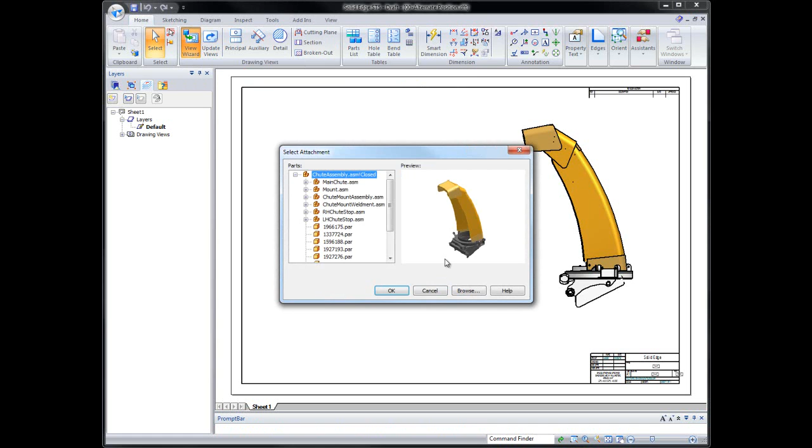Using the drawing view wizard, we can quickly specify which primary and which alternate position we're looking for. In this example, we'll have a primary as closed, and alternates showing a 90-degree open and a 30-degree open position.

Now we're going to select the right-hand drawing view, and once we finish and place that drawing view, we want to show shaded with edges, so we'll go out and place our view.

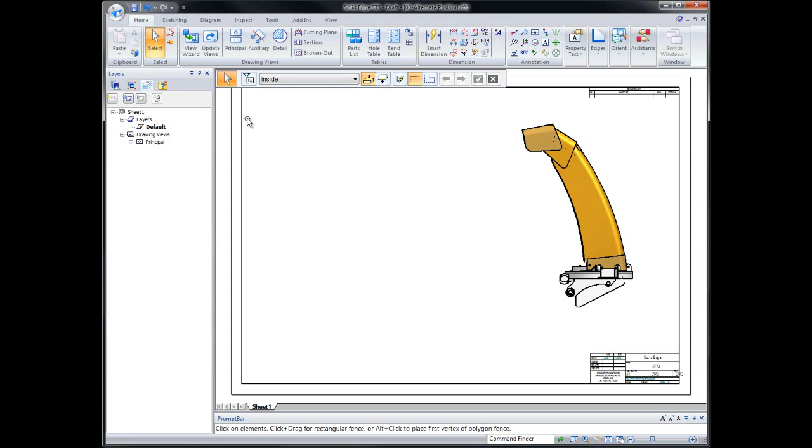Using the drawing view wizard, we can quickly generate a primary and two alternate positions for our alternate position view. In this example, we'll use closed as our primary, and we will have a 90 and 30 degree as our secondary drawing views.

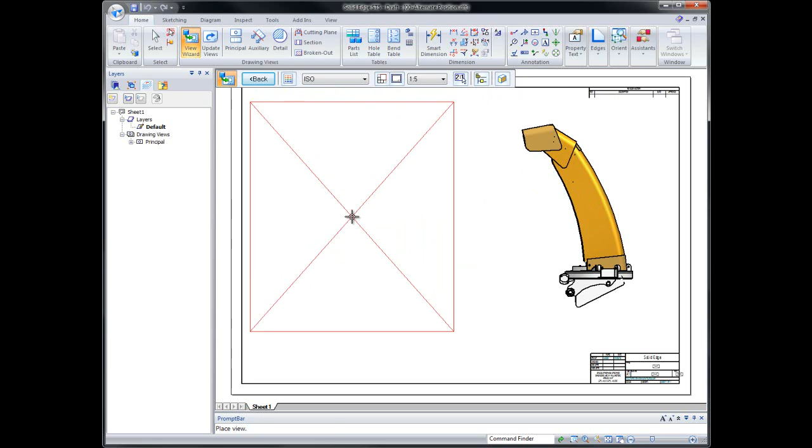Next, we'll select the right hand view and go out with shaded with edges and place our view. And so now you'll notice that we have a primary shaded view plus two alternate position views.

We can also go in and change any existing drawing view. So if I wanted to change my primary view from closed to a 15-degree primary view and then update that drawing view, you'll notice that we've changed an existing view from closed to 15 degrees.

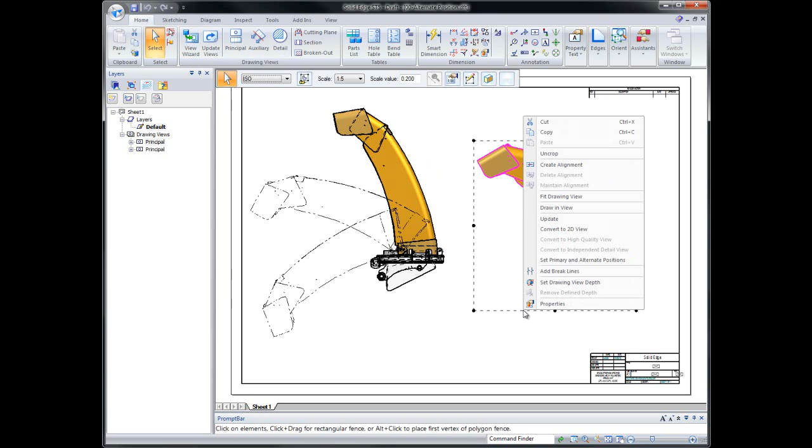We could go back and make one more modification, saying we want a closed and 15-degree alternate position view. Once again, as soon as we update that drawing view, you'll notice that we now have two separate views showing all the different positions of our alternate position view.

For this next demonstration, we will work with a drawing showing both the auger blade and the blower chute assembly. Watch as we use auto balloons and place a parts list that would quickly generate balloon callouts and automatically place the list.

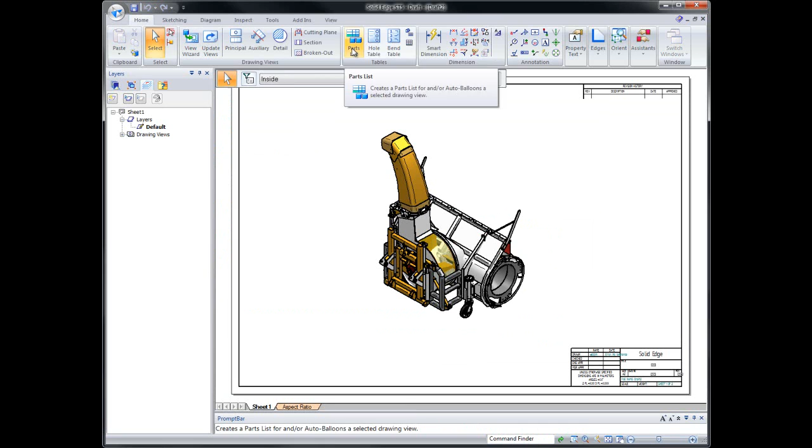So once we have our drawing created, we can immediately go into our parts list command and say that we want to create a parts list of this particular assembly showing balloons and a parts table. New to ST5 is being able to place a parts list not on the primary model sheet, but have the parts list generate on secondary sheets by themselves.

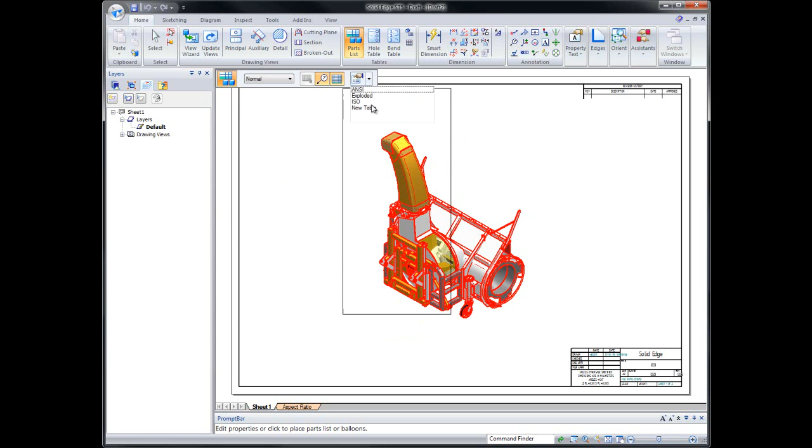So we will go in and choose a new table, then click to specify our view, and quickly you'll notice that Solid Edge ST5 is able to create auto balloons, and with these balloons they're clean and neatly placed on our drawing view.

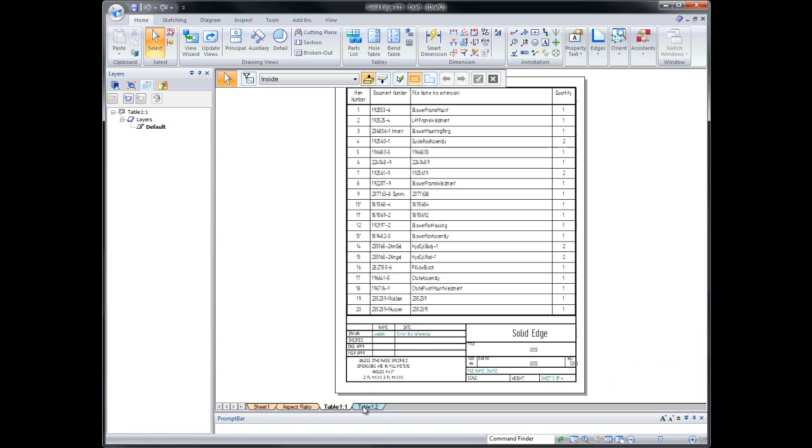Along with that, we created two new tables. So if we look at table 1, you'll notice that this is the parts list for the blower assembly. As we look at both of these two different sheets, you'll notice that you have an item count of 25 components.

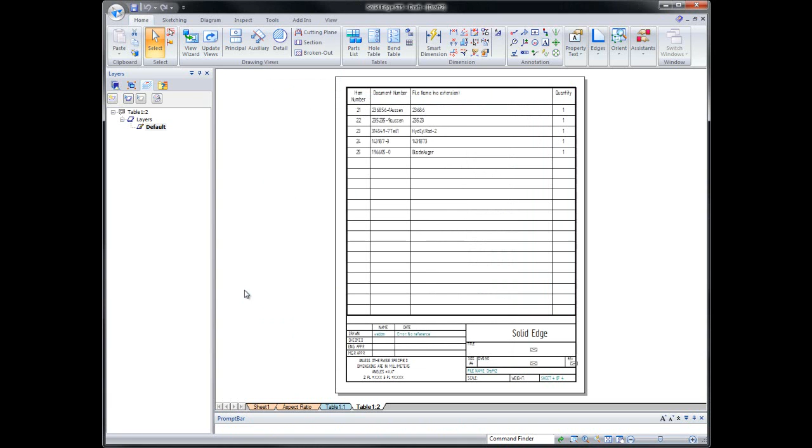If we go into the properties of the parts list, we've got 25 components because we're looking at top level components. But if we select an atomic list, you'll notice Solid Edge will very quickly increase the number of tables because of the atomic list showing more parts.

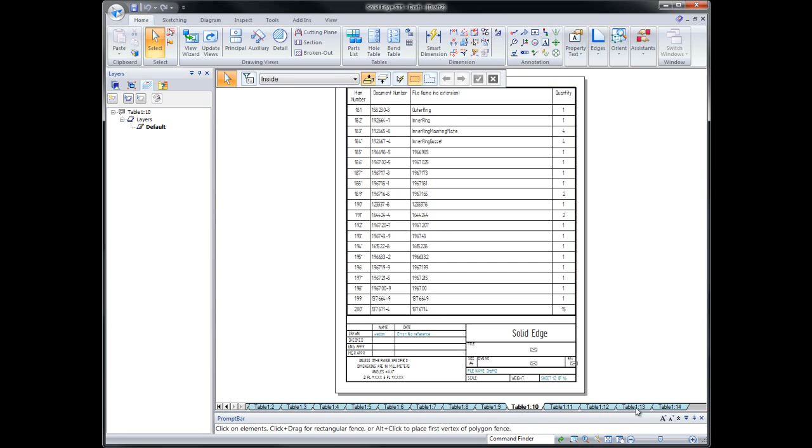So we went from 2 tables to now a total of 14 tables. If we look at each of these tabs, you'll notice now we have a combined total of 262 components. If we go back and change that back to top level, you'll notice these table sheets are very intuitive—they update automatically to the correct number of tables needed to display our parts list.

In ST5 drafting, we have introduced more flexibility in the definition of drawing text. Watch as we increase the spacing between the lines. ST5 also provides the ability to place Roman numerals here, and we'll change the numbers to be uppercase Roman numerals.

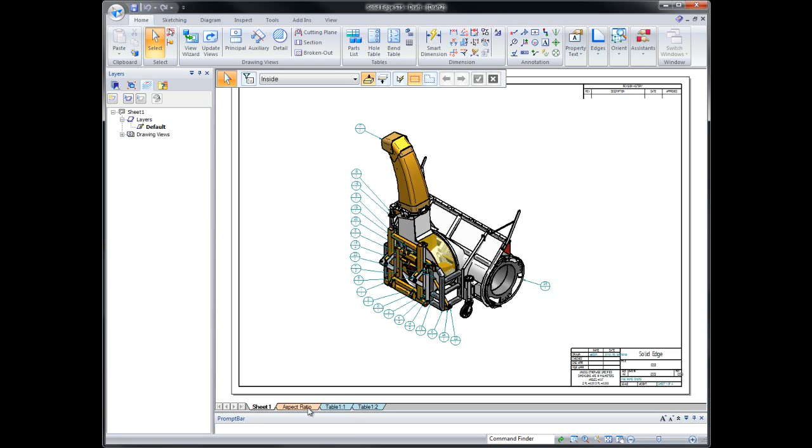In ST5 drafting, we have introduced more flexibility in the definition of drawing text. If we switch over to this different sheet, you'll notice that we have a completed paragraph.

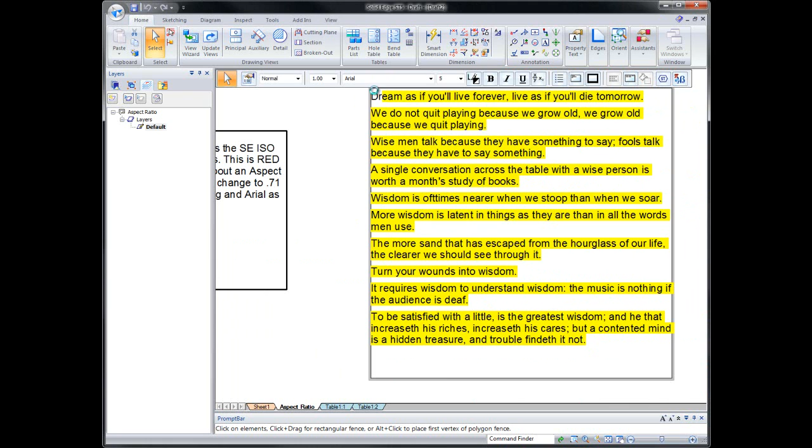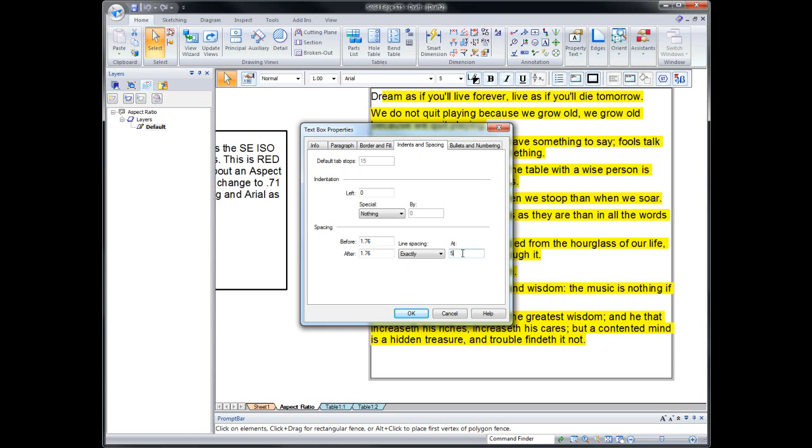With Solid Edge ST5, if we go in and select all of our text and go into the properties of that particular text, under the Indents and Spacing tab, we can increase our line spacing to be exactly 9 units between each line of text that we're displaying.

Along with this capability, it also gives us freedom, once text is selected, to go in and add bullets and numbers. New to Solid Edge ST5 is the capability of inserting Roman numerals, either uppercase or lowercase. We'll just select the uppercase Roman numerals.

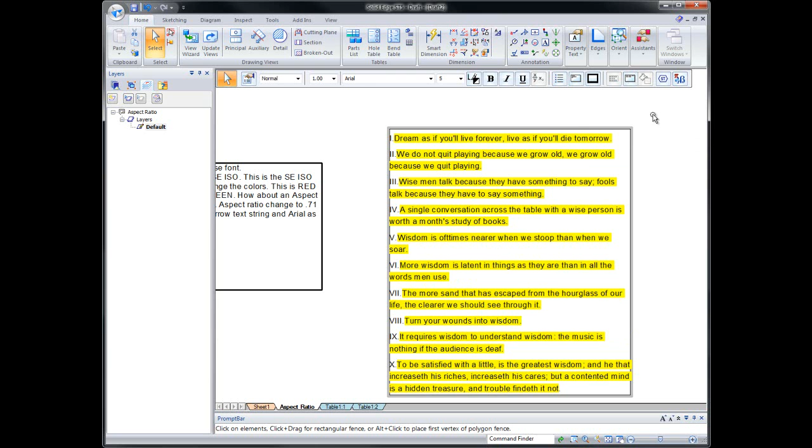In addition to this, some other flexibility we have with text boxes inside of Solid Edge is, in this example, you'll notice that all of our font is an Arial based type font. So if we select a portion, let's say like this area here, we can change that from an Arial font to a Solid Edge ISO style font.

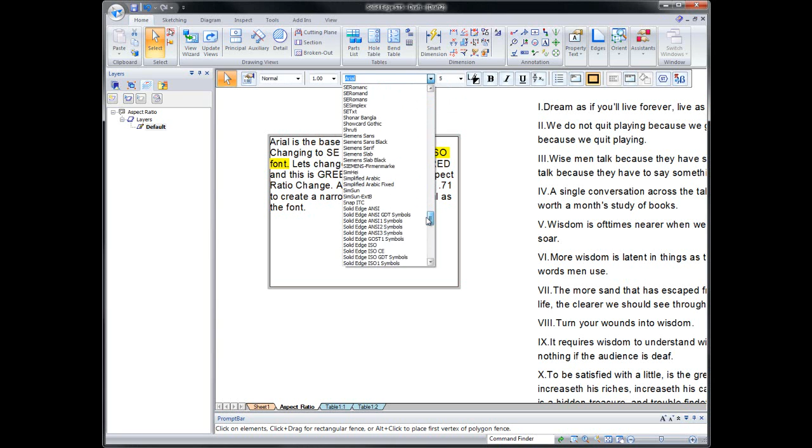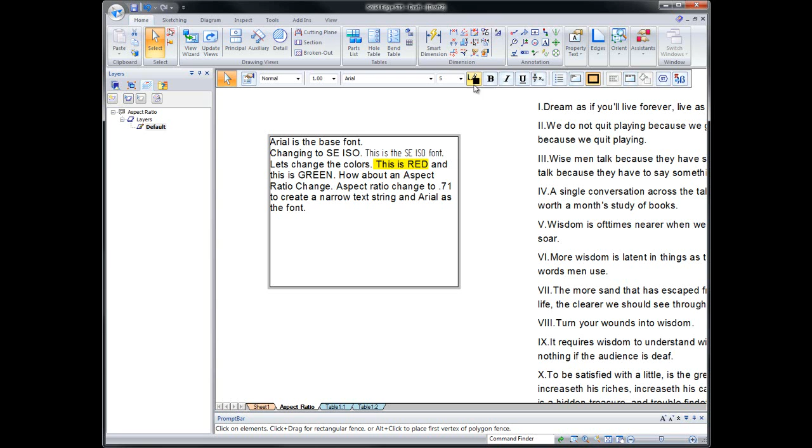As well, I can go in and selectively select a single word or a couple of words or a complete sentence, and I can change that highlighted text into a red color, or we could come over and make this green.

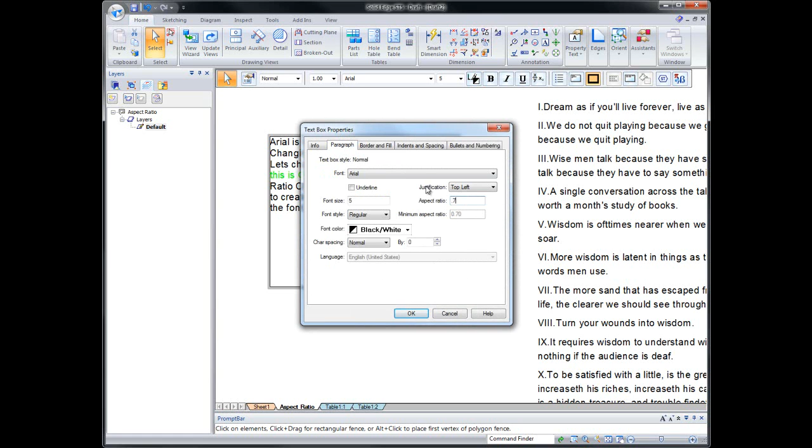And if we look at aspect ratio, right now our default aspect ratio is set to a scale of 1, so I could easily select a portion of my paragraph, and once I go into my aspect ratio command, I can change that to be like 0.71, which will narrow the text string. So hopefully you can see that with our text box and text command, we can control things in a different fashion instead of having one base font for everything.

In Solid Edge ST5, we're delivering hundreds of enhancements, focused on our customers. We listen to our customers and we deliver to our customers. So Solid Edge is going to allow the customer to design better.